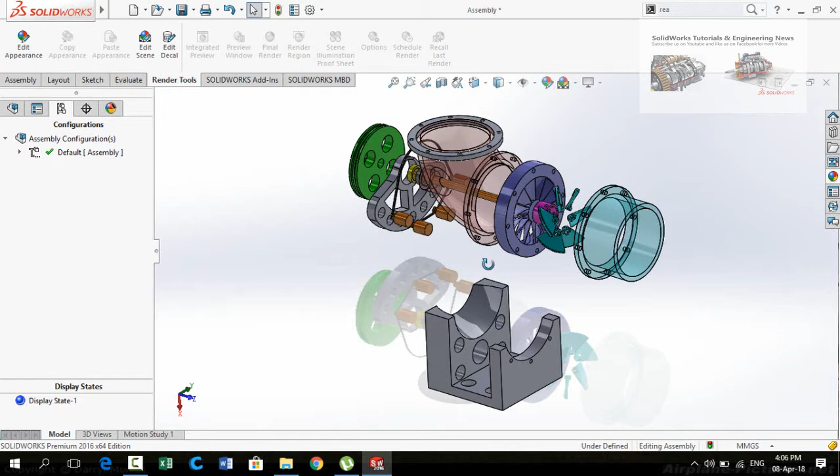Let's start. First of all, I would like to show you a short video clip containing its practical working.

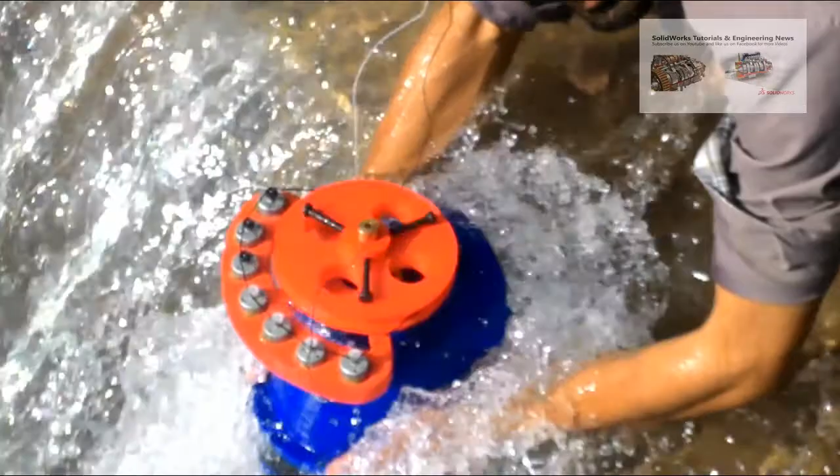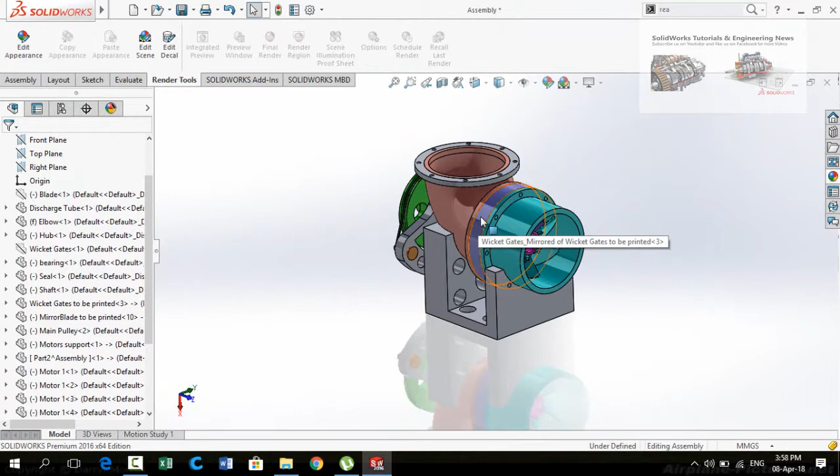So let's start. Basically, this is a Kaplan turbine and it is the final year project of engineering students. As you know, the Kaplan turbine runs at very low RPM, so we could not find any low RPM generator in the market. So to overcome this problem, we are using multiple DC motors. Basically, these are DC motors of 9 volt.

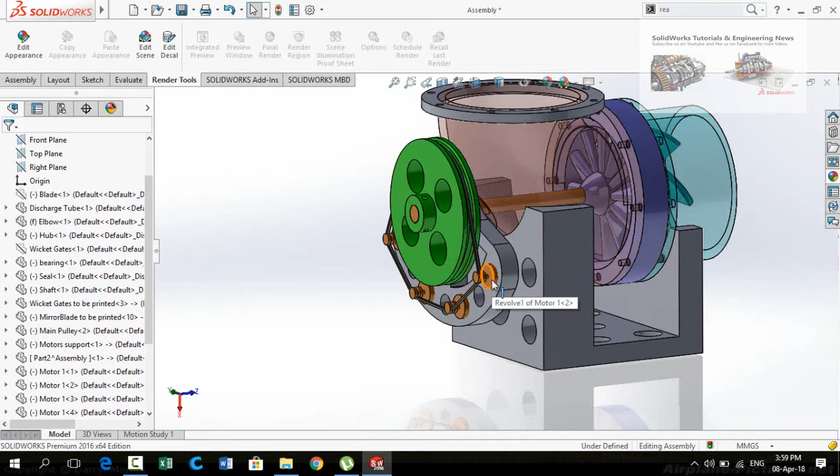As you can see, the runner is rotating these motors via this pulley, and each motor is producing 3 volts. We connected all these 4 motors in series electrically, so 3 is multiplied by 4, and at the end we are getting 12 volt DC output. So let's start.

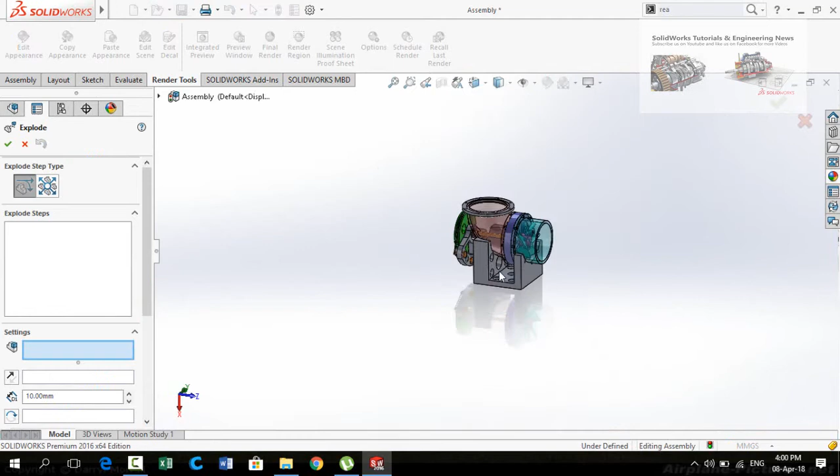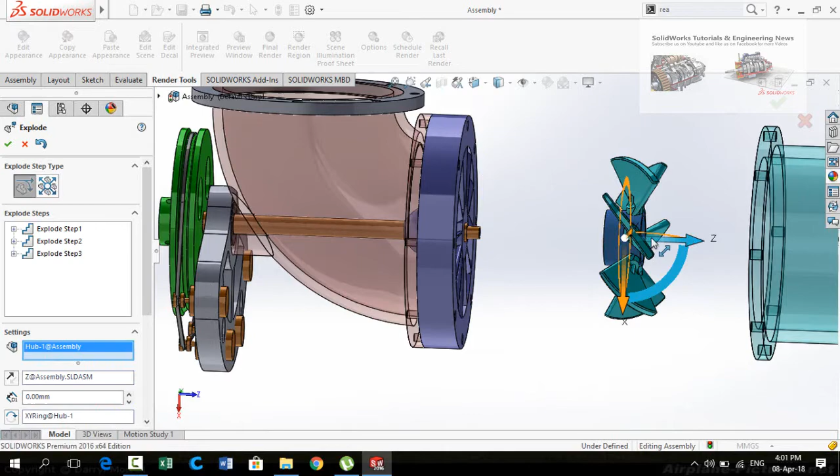This is the base. This is the discharge tube, and here is the runner, and it has 6 blades on it. This is the hub. Blades are connected via a bolt on the hub.

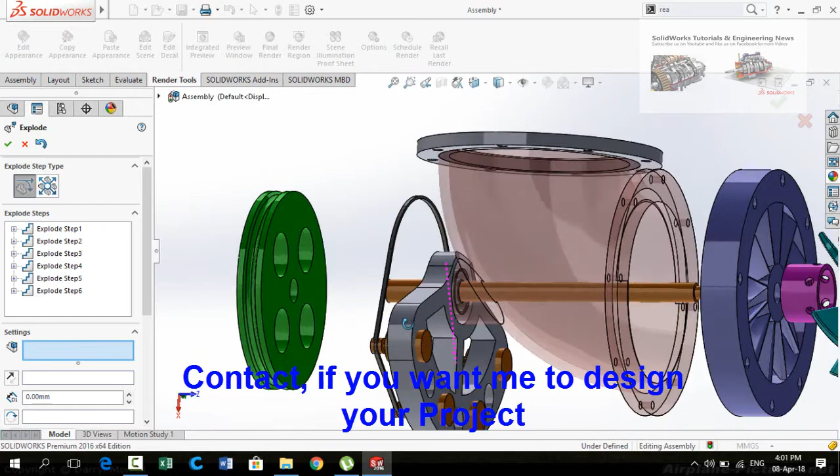This is the wicket gate assembly, and wicket gates are fixed. This is the main pulley, and here is the motor holder, and this is the elbow. Inside the elbow, this is the bearing, and here is the seal to prevent the bearing from water.

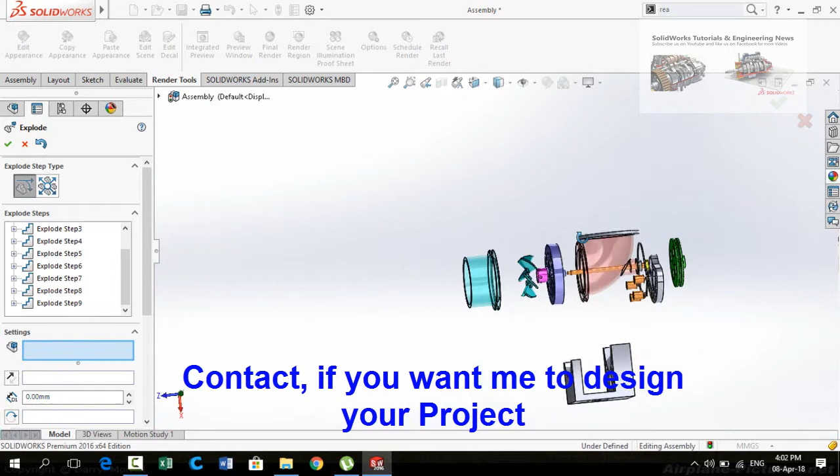Here is the folder containing all these parts, and this folder contains the STLs of all these parts. During manufacturing, you must select brass material for this shaft.